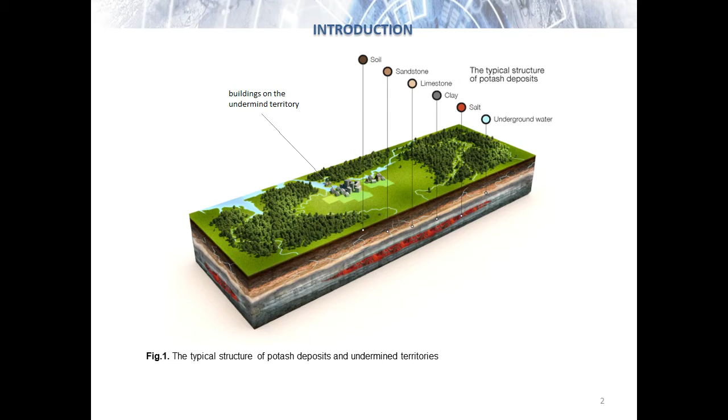There are point objects and there are large arrays of structures such as residential areas and entire cities. The processes of deformation behavior of such types of objects differ significantly, which complicates forecasting. There are great difficulties with the analysis of the stress-strain state of objects that are made of different structural materials and built using different technologies.

It's worth focusing on the fact that modern regulatory documents in the field of knowledge are significantly outdated. They do not take into account the latest technologies of construction and production of mining workings. These regulatory documents are based on research that was carried out in the last century. The methods of predicting deformations used in the documents do not meet modern requirements.

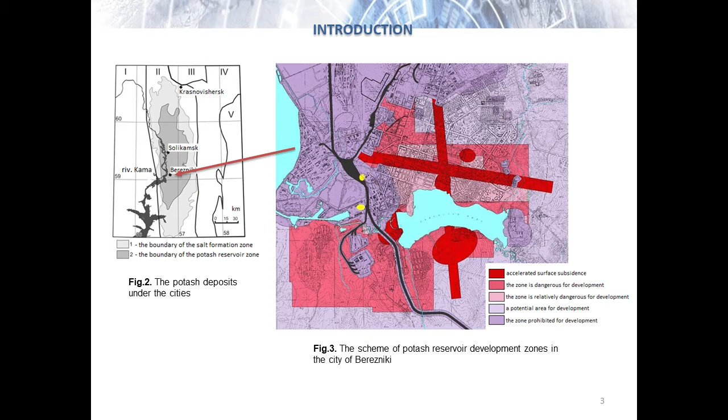Thus, there is a huge list of specific tasks united by a common direction. This direction is the safe construction and operation of various structures in the undermined territories.

Based on field studies, we assume that a uniaxial deformed state occurs in the surface layer of the soil mass in the plane of the soil layer. The thickness of the layer is comparable to the depth of the foundation structures. This condition is caused by mining operations in the underlying layer of the ground massif. We also assume that the deformations in the soil layer are uniform in the first approximation.

The components of this state can be accurately recorded by geophysical measurement tools. This state can always be represented as a field of major deformations in the plane of the Earth's surface. The structure rests on the described layer of the soil mass before the deformation process begins. We study the effect of soil mass deformation on the load-bearing elements of the structure.

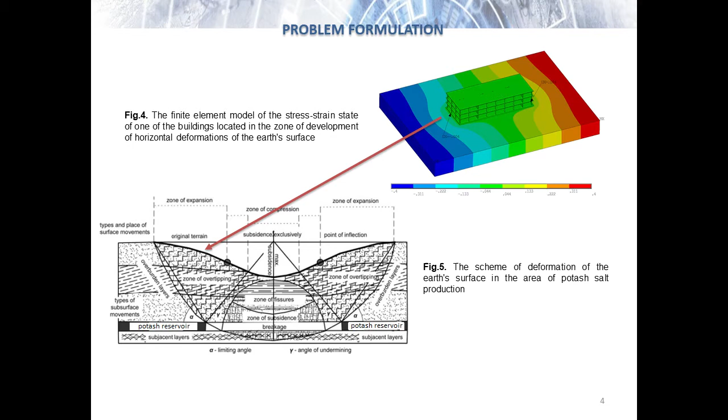We determine the level of deformations in the ground layer which corresponds to the critical state of the structure. Obviously, these questions are parametric in nature. They depend on the type of structure and its height, the type of foundation structures, the type of materials, the type of construction technology, the technical condition of the structure, and others. The answers to these questions are formulated in the space of the described parameters.

The answers are determined on the basis of numerical solution of boundary value problems on the interaction of the structure with the ground mass. The simulation was carried out using the ANSYS software package. The simulation results contain information about the distribution of the parameters of the stress-strain state of the structure depending on the deformation of the undermined area. The limiting parameters of the deformation state of both the foundation array and the structure itself are determined.

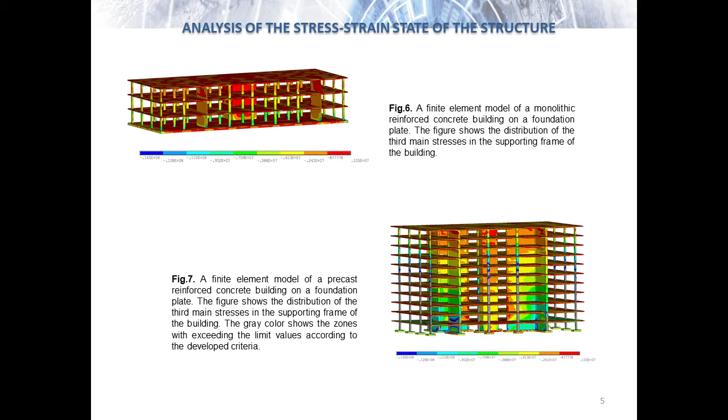Reinforced concrete is a complex composite material. In engineering, there are no strength criteria that allow us to assess its stress-strain state close to critical, even when crossing this boundary. In our work, we had to determine the maximum level of the deformed state of reinforced concrete structures. In reality, it's quite far from the values that are laid down in the regulatory documentation. Therefore, we have developed a criterion that allowed us to approach the solution of the task.

We have created a number of separate finite element models that simulate the behavior of individual critical components of structures. A very high level of sampling was set in the models. The solution was made in a physically nonlinear formulation, taking into account the possibility of cracks forming in the concrete body and plastic deformation of steel reinforcement. The decision was made taking into account the loading time.

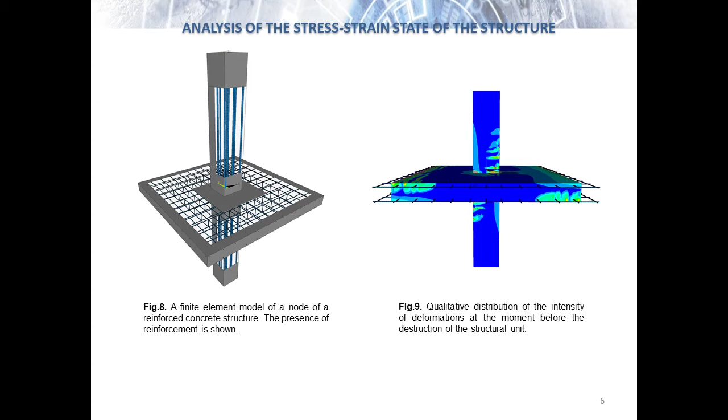This is necessary in order to assess the condition of reinforced concrete units in the whole building, since the solution of the problem of finding the maximum deformations of the soil surface occurs in elastic formulation. This approach is somewhat crude and has a number of assumptions. These include the dependence of the deformation energy of the representative volume on the properties of concrete and reinforcement, on the percentage of reinforcement in the concrete body, and on the geometry of the node itself.

But we have made the assumption that for these forms of stress-strain state and other things being equal, the deformation energies can be compared and brought into compliance with the state criterion. The criterion in this case is the work of external forces which is necessary for destruction in a representative volume. This approach requires further study and organization of a large number of field experiments. We are working on it.

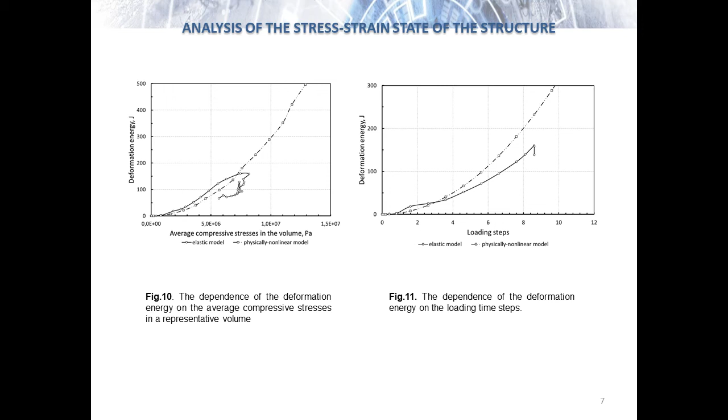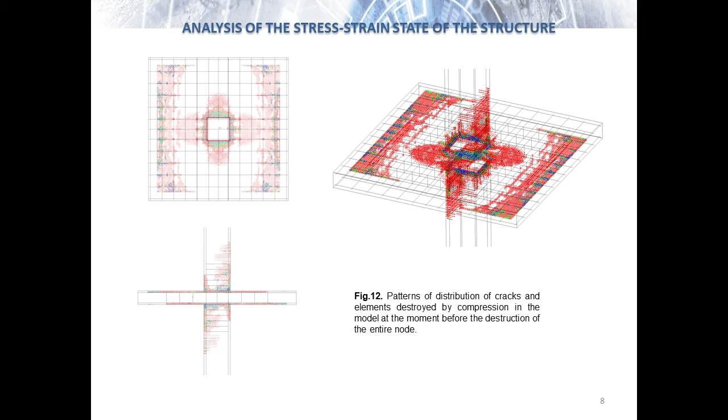These results formed the basis of a newly developed regulatory document that is used by potash salt mining enterprises in the Urals. We analyzed the behavior of a huge number of frames with different values of spans and different storeys. Calculations were carried out for several large panel buildings. For each series of calculations, several dependencies are completed, and the maximum deformations of the soil surface in the vicinity of buildings are determined. But the work continues further. There are a very large number of questions that require answers in this large and complex task.

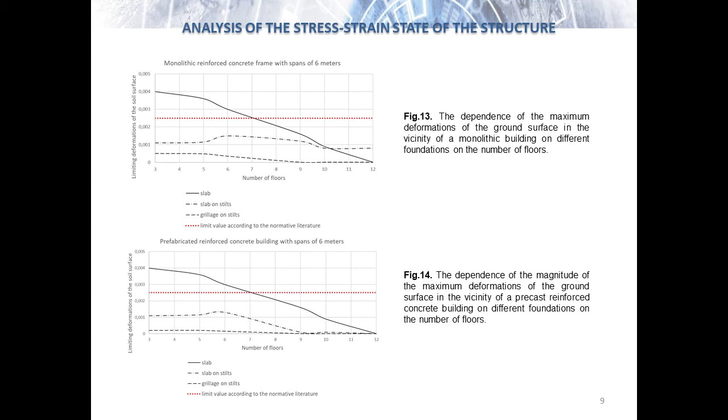We are engaged in the development of a large direction in the field of operation and design of structures on undermined territories. There are also a large number of tasks in this direction that need to be solved taking into account modern technologies and materials. The task that we have presented is only a small part of this direction and requires development. The next steps that we will implement are the following. Clarification and testing of the strength criteria for structures based on the energy approach is required. It is necessary to conduct a large number of both numerical and full-scale experiments to verify this approach.

It's of course potentially very profitable both from the point of view of numerical assessment and from the point of view of monitoring the technical condition of buildings. It is necessary to take into account the remaining components of the deformation fields of the soil surface. It is necessary to consider the problems of combining fields of deformations of the ground surface depending on the position of the axis of the building to the direction of deformation. It is necessary to take into account the rheological component of the deformation process of such complex systems.